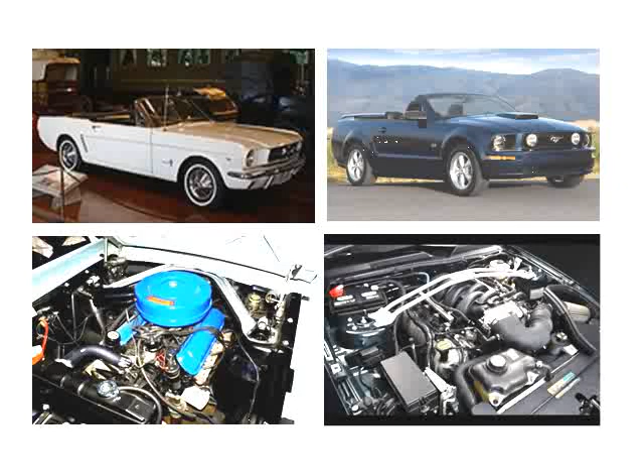Now, in these pictures, there's actually some difficulty. I wouldn't say necessarily bad news, but there's some difficulty. Now, it's not for the customer. We've established higher quality, more affordability for more people.

So where's the difficulty? Well, imagine you're responsible for managing the design of the 1964 Ford Mustang. What do you have to do? Well, you hire a bunch of mechanical engineers, stick them in a room, give them some graph paper, engineering tables and charts, slide rules, coffee and donuts, of course, to fuel them. Tell them, design me a great car.

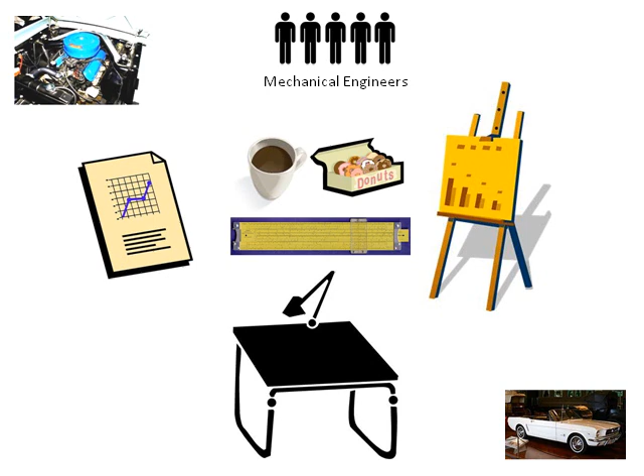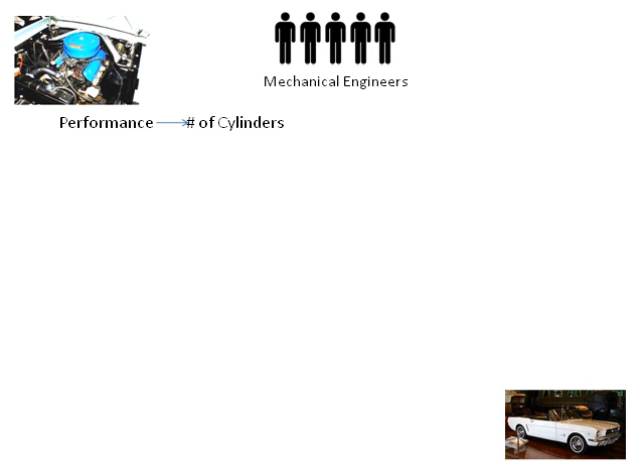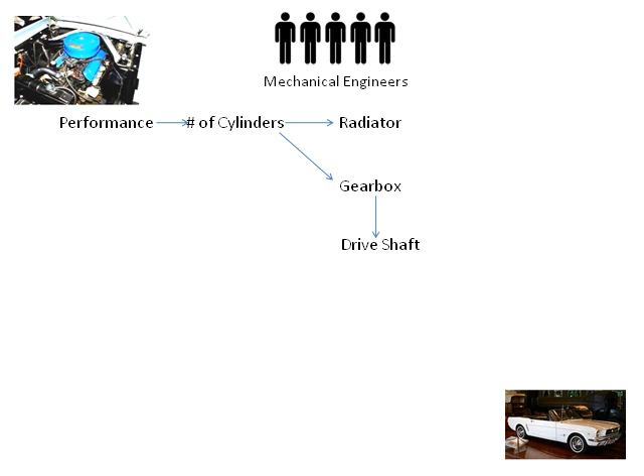And they do. They sit down and say, well, you know, performance is a factor. That tells us how many cylinders. Once we know how many cylinders and we know how much power we're generating, it tells us about the radiator. We know how much power we're generating, it tells us about the gearbox and how we have to manage the torque out to the rest of the car, which tells us how we have to design the drive shaft. Once we got that, we know about the rear axles and the tires. And once we know the size of the powertrain, it tells us about the size of the body.

It's a very straightforward design process. Not only is it straightforward, but it's all done by mechanical engineers who largely understand steel, because everything in that car is steel. Now, fast forward. You're responsible for managing the design of the 2010 Ford Mustang. You say, well, probably need those mechanical engineers. Turns out that's not enough.

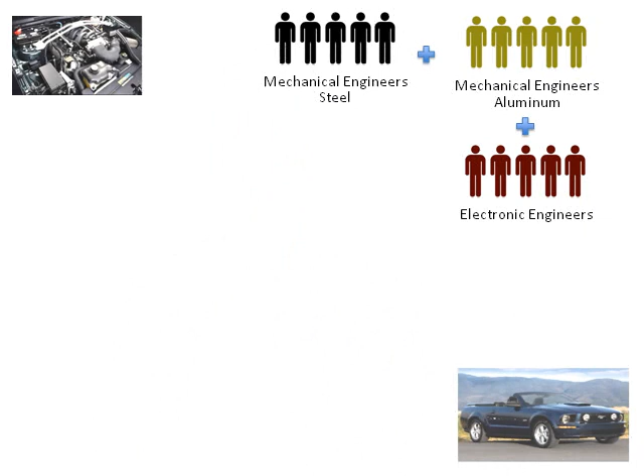Because the ones you hired who understand steel, they need to be complemented by some who understand aluminum, because it's an aluminum engine. Then they start designing the engine, and they're immediately going to hit a roadblock. Because they've got the physical shape of the engine, and they understand something about the shape of the cylinders and the combustion going on inside. But the valves letting the fuel and air into the engine, they're electronically controlled. They need some more engineering buddies from a different department. Then the electronic engineers are inside, but they need some help from the computer software people to write the code which is going to control the electronics.

It just gets worse, because then you're going to have to get fuel into this. No more carburetor, you got the electronically controlled fuel injector. They said, oh, I got the electronic people and the software people. Yeah, but you don't have the people who are masters of ceramics and plastics and rubbers and polymers and all sorts of these other materials which have to work in this very hostile environment. And it just keeps getting worse.

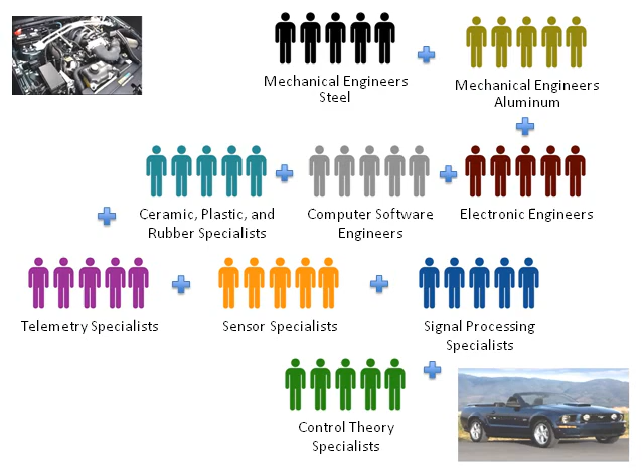If you're managing the design of the 2010 Ford Mustang, you got to keep adding more and more specialty into the room. You have to have the people who understand telemetry, people who understand sensors, people who understand signal processing, people who understand control theory. It just goes off the chart. You need a very, very big room and, of course, a lot of coffee and donuts for all those specialties in the room. But it gets worse than that.

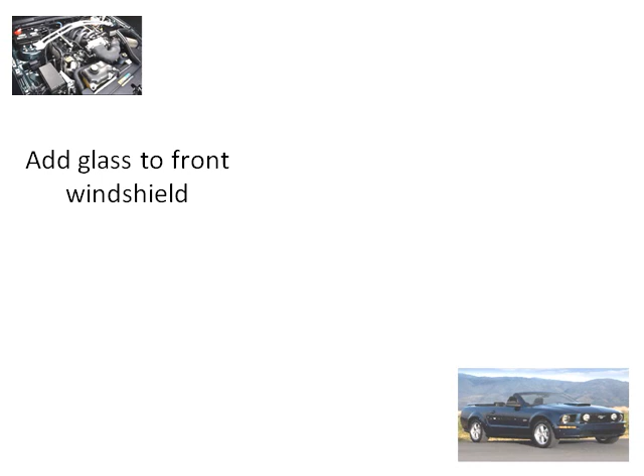See, the thing is, remember 1964, what do you need? Performance. It tells you about the engine, which tells you in turn about the radiator, and the gearbox, which tells you about the drive shaft and then the body. But you make what seems to be a simple choice in a modern car. Let's say add glass to the front windshield. Well, you add glass to the front windshield in a car which you're going to cruise around with the top up to listen to the beautiful sound system. The car's going to get hotter in the summer. It gets hotter in the summer, you need more cooling.

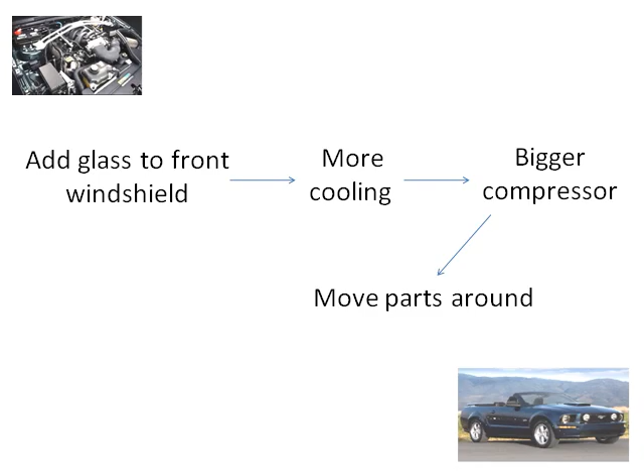But look inside that engine compartment. Where are you going to put a bigger compressor? You got to move this thing for that thing and this thing. It's like playing with the Rubik's Cube, but with big, heavy, expensive stuff. And even if you don't have to move stuff around, or you've successfully moved stuff around, then you have to start moving power around, because you got to power up the compressor to power up the air conditioning. And as you start saying, well, where am I going to draw power from? People are going to start protesting.

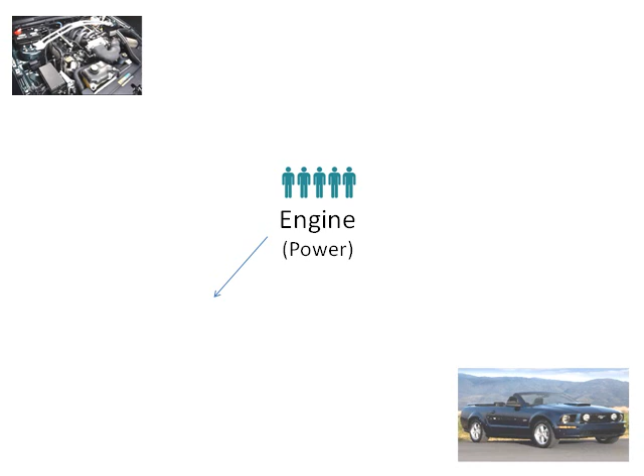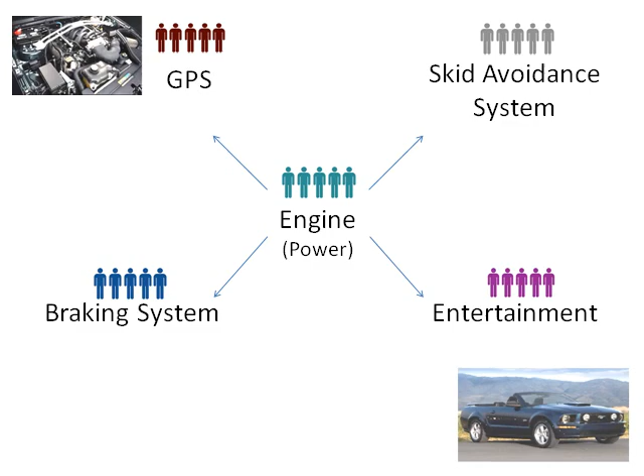Whoa, hold on. I'm also drawing power from the engine for the braking system. I'm also drawing power from the engine for the skid avoidance system. I'm drawing power from the engine for the GPS or for the entertainment. A simple little thought like, let's add a little bit of glass. All of a sudden, you're worrying about how the radio interacts with the brakes.

Well, here's the problem. So when you have a system which is really tightly coupled with all these different components, and remember, behind each of these components is a huge number of different specialties and functions and disciplines, and they're connected not in a simple linear, one leads to another, leads to another. It's A goes to B, B goes to C.

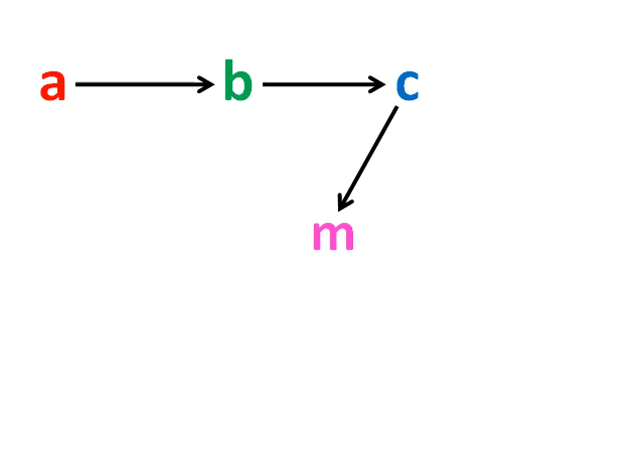So far so good, but C goes to M, and M goes to Z, and Z comes back to F, and F goes off to 3. Where'd 3 come in? And 3 goes to 12, which goes to the Greek letter rho, which comes back to sigma, which goes to Q again. You get everything connected in all sorts of very convoluted ways. It's really, really hard, dare I say impossible, to figure out what actually has to be in the system.

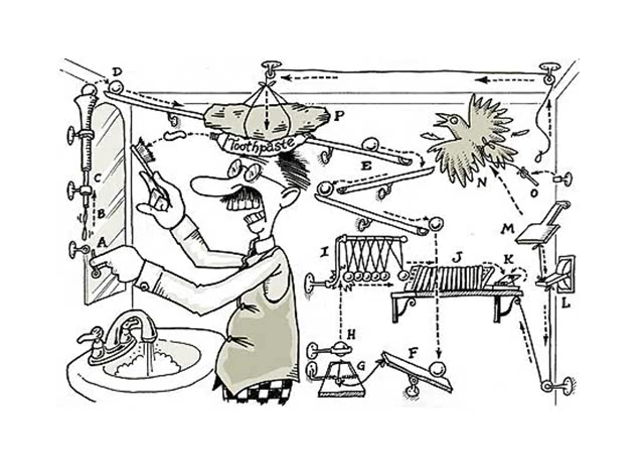So the basic structure, you're not likely to get right on the first try. And not only are you unlikely to get the structure right on the first try, good luck figuring out how this system is going to behave when actually used. So even if you get the structure, you're never going to get the dynamics right on the first try. And this is exactly where innovation comes in as a necessity, not a choice.

Because if you're responsible for designing, if you're responsible for operating something which is inherently complex, you have to, absolutely, positively, have to get it wrong on the first try. But wrong is not okay. Wrong is not all right. Wrong is not adequate. You want to be perfect. People want perfection. But if you can't get it perfect on the first try, you need a second try.

And if you don't get it right on the second try, you need a third try. You need to get better and better and better. What you need to have is the capacity for nonstop, broad-based, high-speed improvement, innovation, and invention if you have any hope at all of taking your complex system, be it a car or the factory in which it's made, and advancing with great speed forward in a relentless pursuit of perfection.